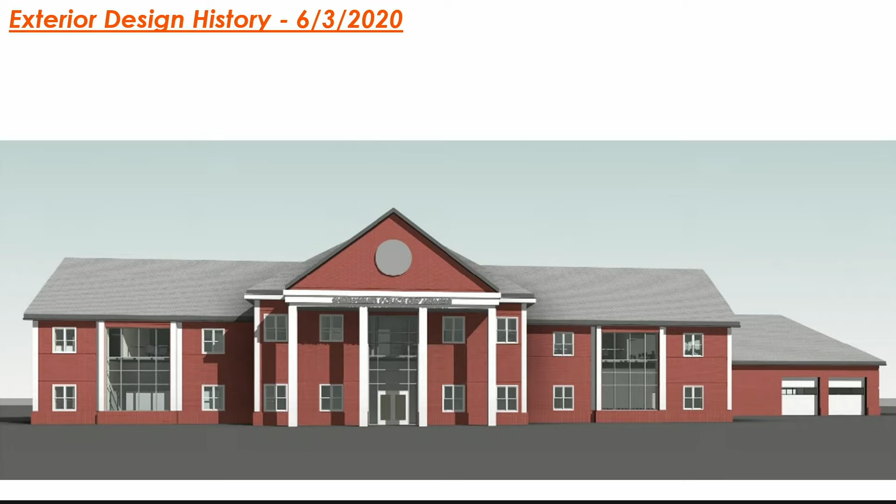It was instantly picked up on that the windows were low across the entire building, and that there was visibility and safety concerns with that design, among other issues. So we came back and said, all right, let's raise a lot of the windows up.

But we had discussed at one point that it still made sense in a couple of areas to keep some of the windows down a little bit lower, where there would be more visibility and less risk because those weren't officer-occupied spaces. So the clerk's office on the left, the training room, and some of the public meeting spaces in the front. At this point in the design, I believe those were just part of the lobby — I don't think those were interview rooms yet.

But so we had raised all of the other windows throughout the building up, and we brought up a stone base. And it had a really heavy feel. We had some feedback that it felt heavy, that it was starting to feel a little fortress-like. We also had this ugly entry canopy that I thought looked kind of neat, but nobody liked it, so we got rid of that.

So in July, we came back with another option and said, well, we can bring some of the windows down, keep it open, and bring in some planter beds and things like that to help protect the front of the building and bring the scale down. This is where we started to relate the central mass of the building and tie it back to town hall with this hipped roof. We had a fenced area instead of what has now become the cupola.

We still had that stone base, and it was heavy, it grounded the building, but we think this language started to tie a lot of the architecture together. And by having the planter in the front with some trees and things like that, it started to screen some of those windows and became more of a passive protection for the people in the building.

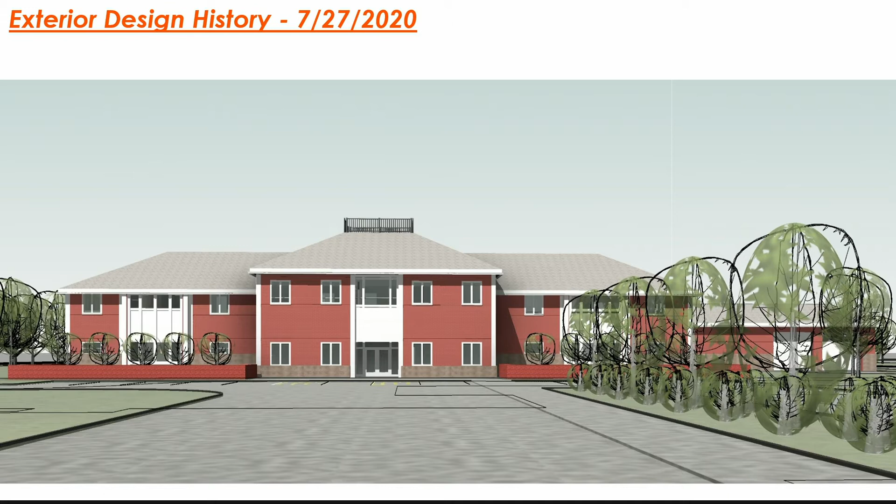And then this is what we took to town meeting, which is a variation of that same thing. It's basically the same design, just a little bit snazzier of an image. Again, the low windows at the clerk's and the training room at the very front of the building, and everywhere else we had raised the windows up, and we brought this heavier stone base up to match it as this sort of ground line that came through the rest of the building.

Then the question came up once again about the low windows, and we wanted to talk about safety and security. The question was asked, well, what about some other police stations around the area? What are other departments doing? So we brought in a few examples we had done — some fairly local, some a little further away: Lexington, Westport, Sutton, and Wilbraham, Massachusetts, all recently done by this team. Neil was the OPM on all of them except Lexington.

Just to give a sense of what other departments are doing — we have low windows in all the occupied spaces, and sometimes we do ballistic rated glazing. Of the departments we've done in the past 6 or 7 years, we did 2 with ballistic rated windows, and that one on the bottom right, Wilbraham, was one of them. It's actually not all the windows, just these two — that's the dispatch area. The rest of it we went with actual fiberglass framed, double glazed windows like you'd have in a lot of public buildings.

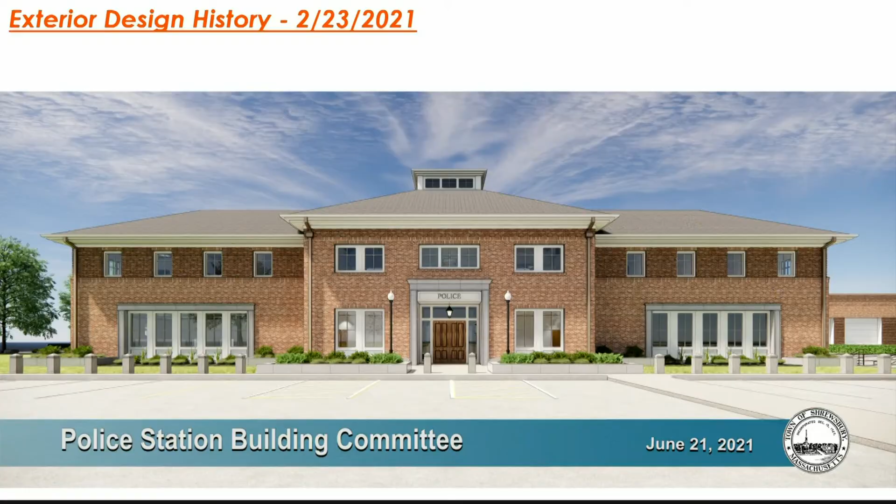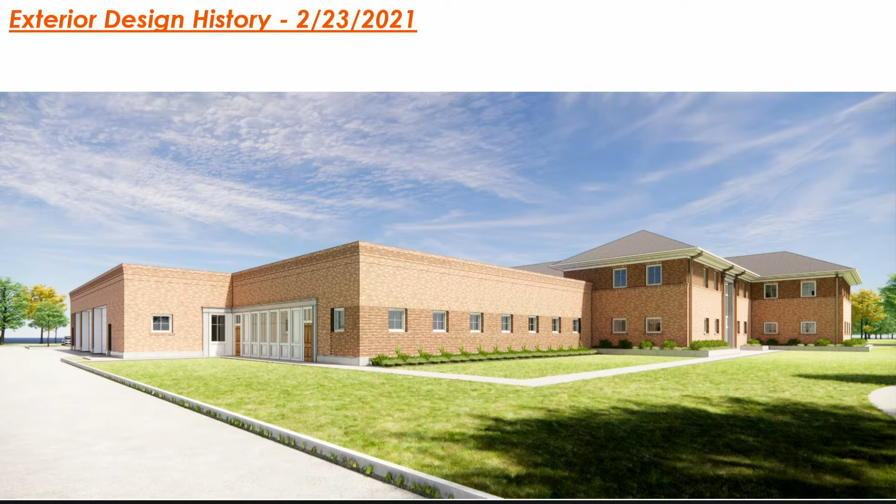So from there, after that conversation, we came back, and this is essentially where we landed. This was in February, much as it looks now, with some minor changes. This was the back when we had discussed lowering the roll call windows here. We had never really shown the elevation of that space until now, but you can see where all the other windows are raised up through the rest of the building into the officers' office spaces. For comparison, this is the head of a door, so the bottom of the window is somewhere in this range. And that's where we are today.

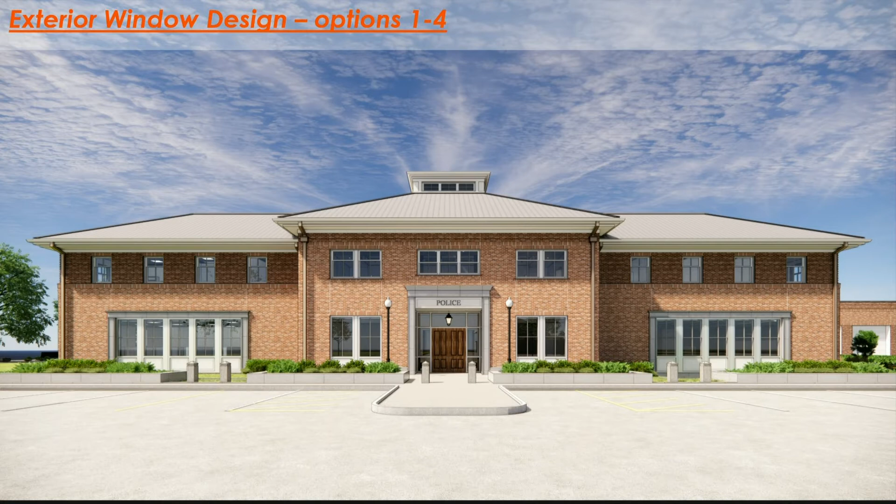So, since we're talking about bullet-resistant glazing, I have lots of options because there are a lot of ways we can go with this. I have some images that show the different options. There are 6 main types of options we can go with. The first 4 will leave the building looking pretty much exactly the way it is now, but they have implications on cost depending on the way we go.

Just as a reminder, the fitness room is back there to the bottom right. Options 1 through 4 have to do with the glass itself. The first one is no change, we leave it as is, with a nice thermally broken insulated glazing system, so operability of the windows allows natural ventilation in each of the occupied spaces. Option 2, if we're talking about just visibility, there was some discussion about visibility versus ballistic rating of the glass. One option would be to film some of the lower glass so you wouldn't be able to see in.

The disadvantage there is that it would change a little bit of the look of the building depending on the type of film we go with, and the top lights wouldn't match the bottom lights. You also wouldn't be able to see out, and it's always good to be able to see out of a police station, to have that eyes-on-the-street mentality. If somebody is coming to do harm to the building, you want to be able to see them, not necessarily just from the camera system, although there will be a robust camera system.

Option number 3 is replacing just those lower windows, just the lower lights, here at fitness, roll call, the public interview rooms, training room, and the clerk's office. It's about 330 square feet of window to do those areas, and we can replace those with ballistic rated glass.

So when you say about 8 feet, is it 8 feet from the floor where the person would be standing? The floor, yeah, I'm talking about from the floor. So it is 8 feet, not about 8 feet? I don't have the exact measurement right here, but it is about a foot over the head of a door, so that's about 8 feet.

From this image I won't be able to tell exactly. Is it almost like that door over there? Right, it'd be like the top of that door, the top of the transom.

Option 4: this would be replacing all the windows in the building, all the main exterior windows. There's about 1,850 square feet of glass, and using that same approximate low range of $180 a square foot, it'd be in the range of $330,000 to $600,000 to increase the ballistic rating to a level 3 for all the windows.

Now, option 4B is replacing the windows with a ballistic rated glass system. So what I've been describing is replacing just the glass. You'd still have your typical curtain wall frame, what you'd normally put the glass into. So it's ballistic rated glass, not a ballistic rated frame. There's potential that the frame could fail if shot at, because it's not a rated system.

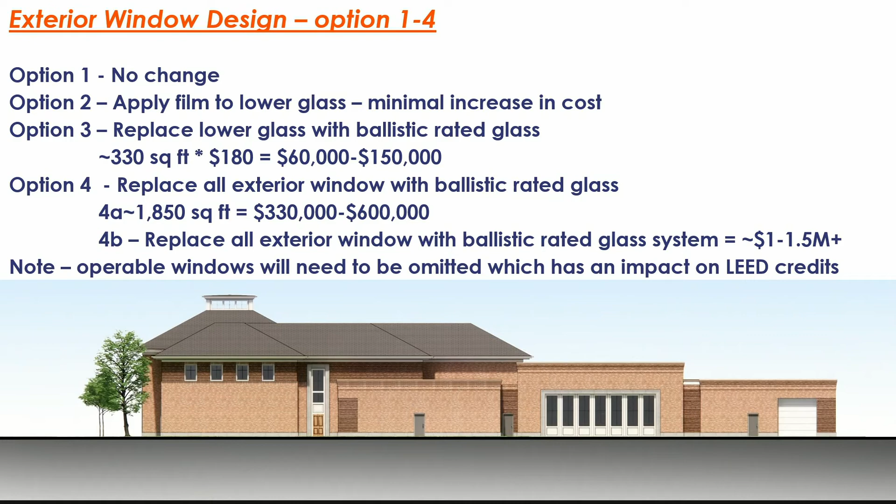Oh Donna, go ahead. I don't want to interrupt if you're still talking windows, but, so you showed us the 4 buildings in the state that you've done this for, right, as an example of 4 buildings. If you were to look nationally, are there police stations that take these types of issues further?

There are certain departments - I think Jeff can answer this, he does police stations nationally. The number of police departments I've worked on, and I've done over 100 over 30-something years, that actually have full ballistic glass throughout the entire building are very rare.

There are quite a number I've done where you identify particularly vulnerable areas. We have one small station near a busy roadway, so all the road-facing glass is protected at a level 2 ballistic rating, in case somebody's cruising by and taking random shots. We've done a number where they protect key areas - for instance, if you've got a lot of glazing near a roll call room, especially if it's public-facing, that's a good place to consider ballistic glazing.

I did the 4th Precinct facility down in Norfolk, Virginia - about a 40,000 square foot police precinct. It does not have ballistic glazing, but it utilizes predominantly higher window sills. It's a different, more modern kind of architecture. Pretty much every window except the lobby and training room are very high sills. The lobby and training room were designed for community use, so they don't get that high sill treatment.

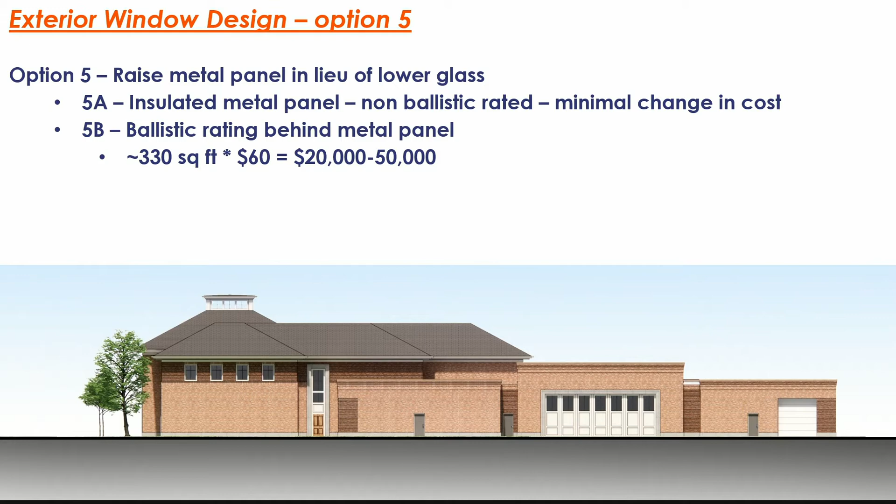If we were to add ballistic ratings behind that, there would be a modest add in cost to do those. There's additional edge metal framing work, drywall work. You'd have to buy the ballistic liner panels, which are not inexpensive, but it would be in the $20,000 to $50,000 range to do this.

And then the last option would be if we were to infill this area with brick. Brick is ballistic resistant in its material makeup, so we wouldn't have to add anything behind the wall to do that. It has an intrinsic ballistic resistance because of its density. There isn't an official UL ballistics test on brick, but it's 3,500 pounds per square inch. It's got good density, which means good mass to resist a projectile.

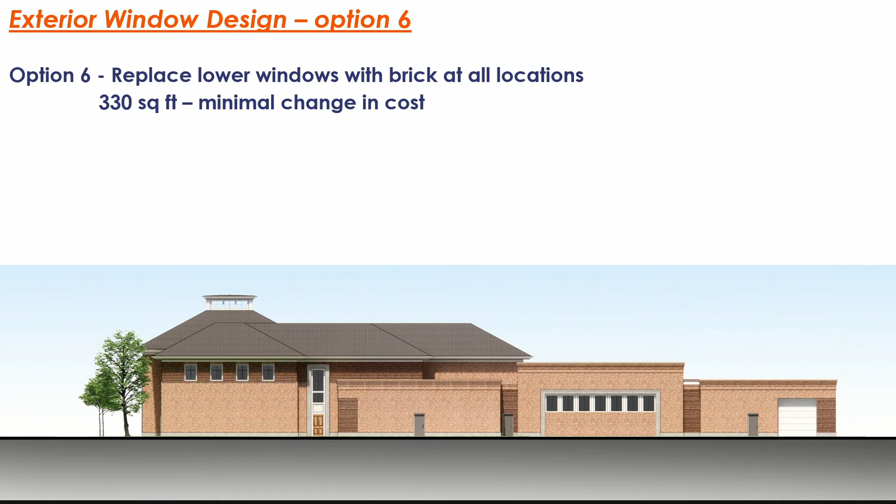And there's a minimal cost, it would be exchanging one thing for another with the windows and the brick. One thing I wanted to point out, if we went to a ballistic rated system, I just want to show you what it looks like. So this is a ballistic rated entry system.

So what you get is sort of what you see. It's that utilitarian storefront look, and it acts as storefront. There's a difference between storefront and curtain wall in its performance and the longevity of that system. So it's not as robust with the way that it drains and weeps out water. And then with its detailing and finish options, it comes in two colors: this silver unfinished look, which they call clear, and bronze. That's pretty much all you get.

We're proposing for everything to be bone white, which matches the trim around the campus. That would be a custom color to do with this system, which would increase lead time and increase costs. That's it for the frame, that's what it looks like. It's just that one rectangular profile.

To match and give that historic New England look, what we have proposed at the station in the renderings is a more robust trim profile that we would have to make up differently if we were to do it. So it would require us basically redesigning a lot of the facade to make this work.

Also, this thermal performance — this is a section through it, so you get an idea of how these things are put together. It's a much heavier frame system, basically a solid piece of aluminum. They call this thermally broken. This is the pressure cap, just the little piece that covers it up to finish it. So it's not really thermally broken.

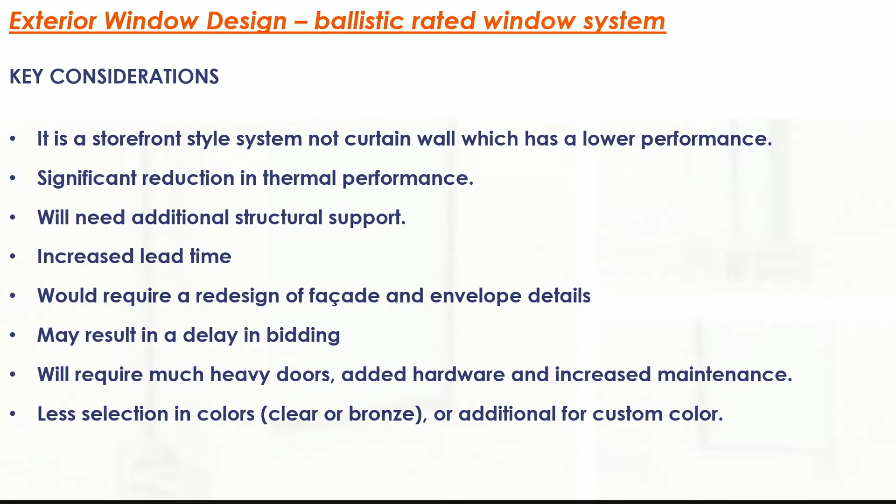Matt, can you go back one slide? I just want to compare. Maybe that's not, I think you went forward. You had them all listed, 1 through 6. Yeah, right there. So this is a comparison of all the different options, option 6 to option 3.

Does option 6 have the cost? It would be the minimal same change in cost. But option 5 to option 3 - option 5 is raising the metal panel and adding some ballistic ratings behind the metal panel, not changing the frames. Option 5 would be $20,000 to $50,000, give or take, and option 3, doing just the lower glass and not the frames, would be 60 to about 150,000.

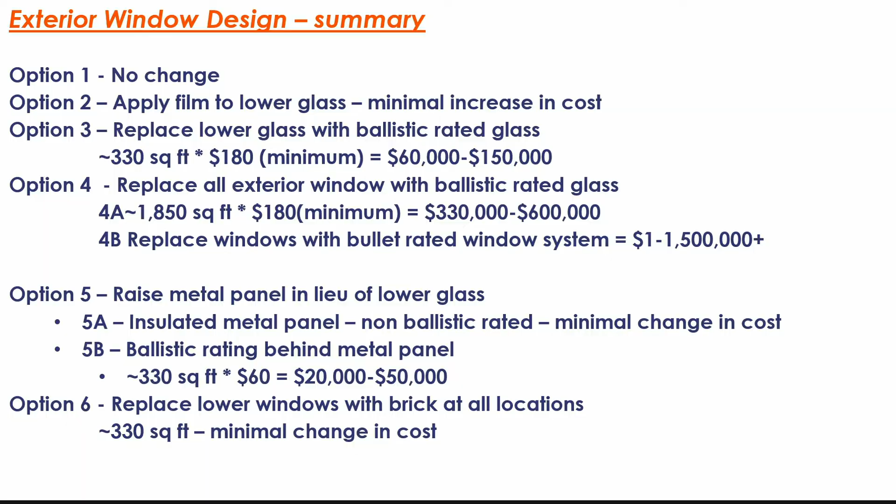So we do it where it's just the glass and not the frame. It's simply not a tested system. Like Jeff was saying, the brick is intrinsically ballistic resistant, but it's not a tested system. Same thing.

I can't sit here and swear on a Bible and say that if you shot at just the glass in a non-rated frame, that it would perform and not possibly fail. But it would be significantly better performance-wise in that situation than not having rated glass, if that makes sense. I guess my question is, on the frame, if we were just to do the glass and keep the frames we have, which I think look much nicer, in your expertise, what would you say it would be rated?

I know it's not rated, but can you give that? I certainly think it would slow down a bullet. Any material, if a projectile is coming into it, it's going to lose energy. Now, it might also fracture, so you might have smaller pieces going through. Would it get to a level 1? Maybe.

I don't recall what's on the other side facing Maple Ave. All the other windows are up high.

Would it even be in those two training rooms in the front? Yes, the only areas of the building at that point that would have lower windows that wouldn't be rated would be the vestibule where the entry doors are, because there's two layers there, and then one of the stair towers.

So, I know it's early, but we could be talking $150,000 to do the first floor, basically. And we spent $285,000 to make the air a little more comfortable in the building. To me, this is a no-brainer.

I hear what you're saying about the ballistic frames, because I've seen what you're talking about, the deterioration. And I think 95% of your shots are probably gonna be taken through the glass. It's probably gonna be an errant shot that goes through a frame. I agree, and I think even if it hits the frame, it's still gonna have some stopping power a little bit.

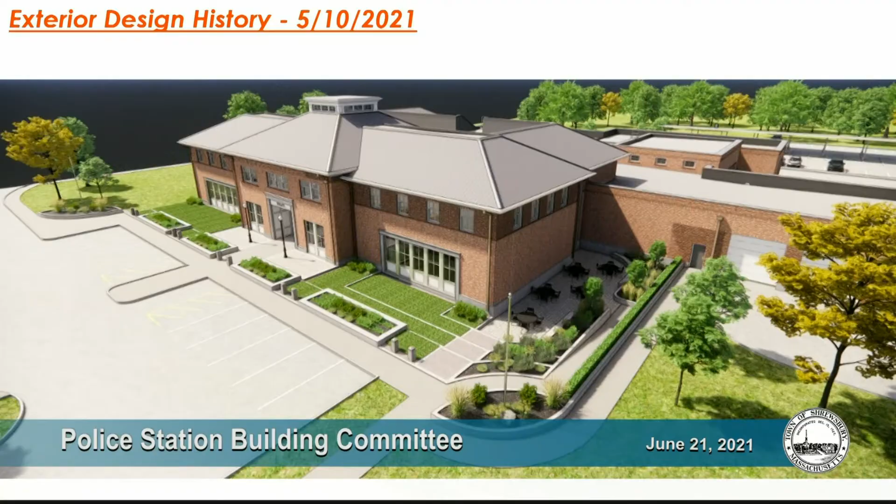So those are already raised up, though? Just these four windows, this little guy. I would recommend, if it was my building and my aesthetic, if we're raising the windows up, to do it with the metal panels and not the brick.

Architecturally, just the aesthetic of it, I think when you put the brick in, it starts to look pretty fortress-like. What's the ballistic rating of that, the one you were talking about that went behind the metal? It would be the same as what you have in the front lobby.

If you want it, at that point you don't see anything behind there. It's not really a public side of the building, so I'd be okay with that. Just to clarify, what you're talking about is the difference between glass that's bullet resistant and a Kevlar mat that gets mounted on the inside face of the sheetrock inside the building.

From the inside of the building, it looks like a sheetrock wall. From the outside of the building, it looks like a metal panel. And hidden between those two layers is a Kevlar mat that takes the round.

All the windows that are low enough, the low ones. Yeah, I mean, I think the admin staff should be safe as well. I agree, and also those front rooms where they're gonna be community rooms.

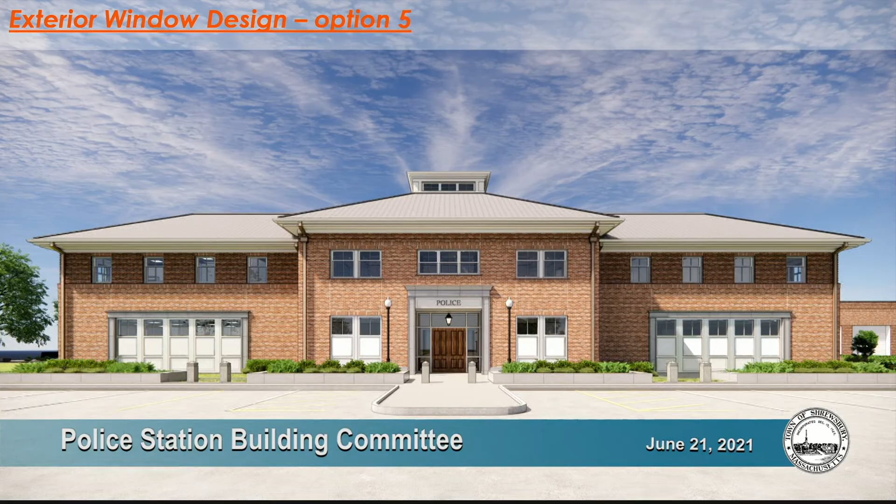We're talking about doing that, adding those metal panels in. You can't see into the building now, right? So do you still want them to be ballistic rated, or is blocking the vision like that enough for you?

A level 3 ballistic panel built into the wall is roughly a third the cost of the level 3 glazing. For that square footage, I don't remember what it is, but say 20 feet by 3 feet, 60 feet times $60 a square foot is what we'll spend on armor, so it'll be $36,000 - someone check that math, I think I'm putting a zero in there.

While you're doing the math, can I see the fortress again, please? No, the back. The back with the brick? Yeah, yeah, I don't mind the back, brick in the back.

But no, it's more expensive than the panels. It is? Yes, really? Is that more expensive than the panels? That would be more, yeah, so I didn't have a price option for that, but that would be more expensive than just the panels by themselves.

But what about the panels with the ballistic backing? Now it's splitting hairs, it'll be about the same as having that. Well, less than the glass, though. No, right, it's less than the glass. So less than the glass.

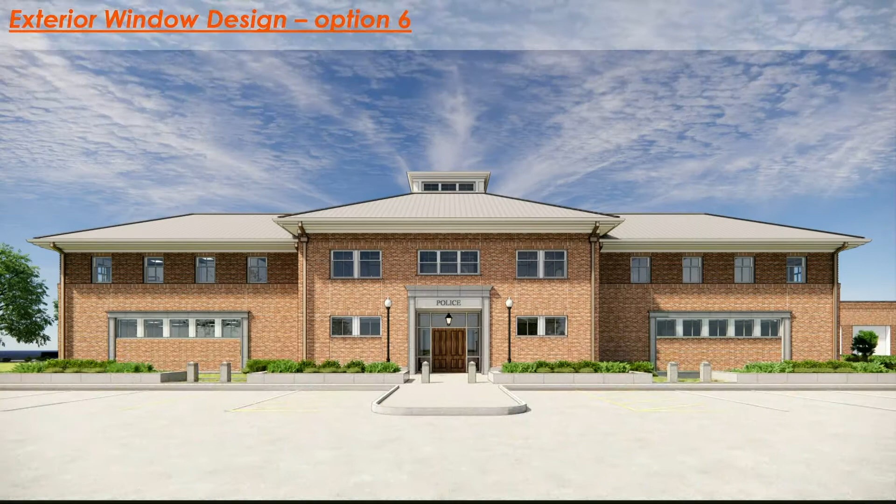And are you comfortable, chief, with that compromise of doing the panels around the back and doing the glass? I personally like the glass, the full thing, even around the back. But I know it costs more. I do like the design the way it is right now.

I guess that one's not too bad, but in a perfect world, if we could just make all first floor glass, you guys would in a perfect world. Yeah, right, I know. So now my head's scrambling.

Is the glass more protection than the panel? No. Is it less protection than the panel? No. We're proposing it at the same ballistic level, the glass to the panel. So it's equal in protection, different in cost.

Obviously glass is transparent, we're trying to save something. How much would we save in the back by putting the panel? Just that window, what did I say, $10,000? If we did that one in roll call, more like 20,000. Again, that's the low end of Matt's range.

Could be more, probably not less. I mean, I think, since this isn't a public side of the building, if we can save $20,000 here - because we don't know what material costs are gonna be going forward, including structural steel - I think where we have opportunities to save money and keep the aesthetics for the public view, that's something we should be doing.

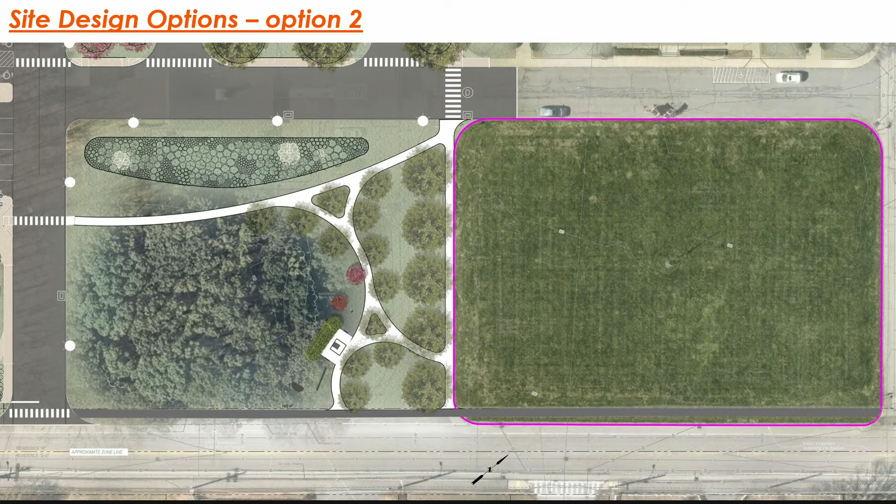We're also continuing to work through options for the softball field and second egress off the site. We did bring the planning board up to speed that we're looking into this and that we would probably be pursuing a de minimis change with this should we go forward.

We're also trying to keep it out of the wetlands buffer zone too, to keep this out of Concom so that we don't have to go back. But we would be looking at probably doing some version of this second exit drive out of here that would be used for emergencies only. And we'd be looking at doing like a turf pave system or something like that so that it's not really there, but it's there if you need it.

We're just working out the logistics and locations for these two soccer fields and how the softball field works out. I thought I was gonna have an updated plan with some options today, but it did not come in time. So more to come on this, but this is something we're gonna be continuing to work through. Oh, that's all I had.

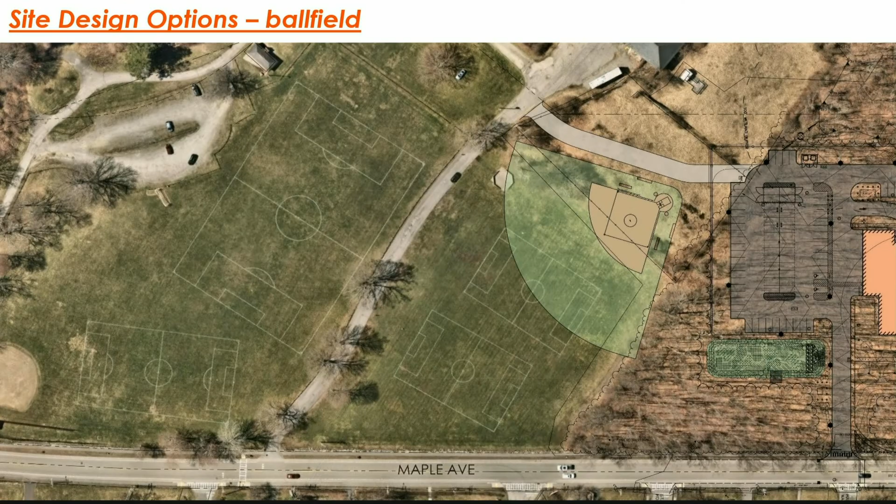So let's look at some finishes. That's all I had for slides. So, Brianna's here. So we can look at the interior finish boards that were dropped off a little while ago, and then we do have some updates and other samples.

And then these are some of the exterior finishes. So this is what we're looking at for the brick. This is our precast concrete finish.

Our metal roofing is gonna be this color here. And then all the other metal trim on the outside of the building is gonna be this, which is bone white. This is just a sample of what the roofing looks like. So it's not like your standing seam roof that you see on a lot of commercial buildings. It's a standing seam shingle.

So in a regular standing seam roof, this would go the whole length of the roof all the way up and down. These are this big and they come in tiles and they all interlock together into this, so that it has more of a slate shingle kind of look to it. It's a really attractive system.

This isn't exactly the curtain wall material that we're using, but this was just to sort of give you a sense of how these components come together, to show the difference between this and the ballistic frames. And then this is what the glass will look like.

This is actually Solarban 90 with Acuity, they call it, so it's got an extra low iron. They used to call this Starphire glass. This is a new version of it, and it has better visibility through to the outside, so that you'll have better view of your surroundings at night and things like that. Okay, better eyes on the street thing, so it's a security thing.

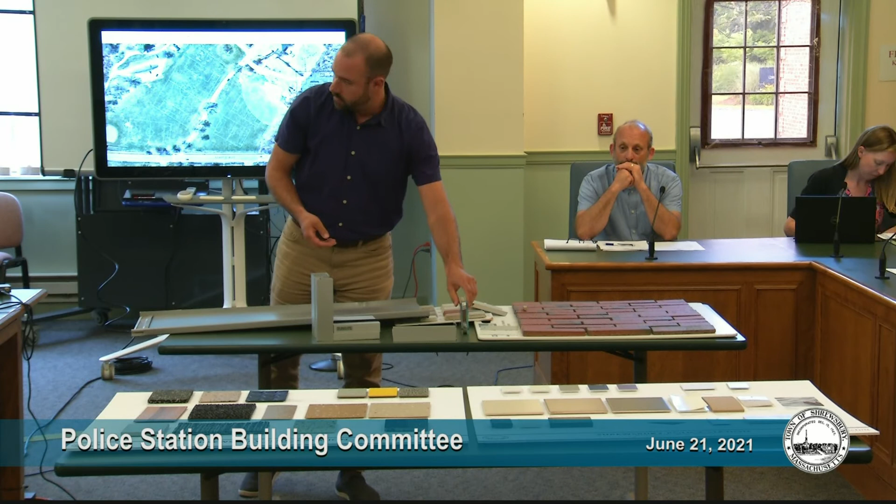That's all, I'm gonna let you in. We've gone through all this, so really, I think this can just be an open discussion and conversation about finishes. There's been lots of discussions behind the scenes, and I think we can all come together. I think the main thing to point out, though, is we're talking product quality and where it's going. The colors, we can always adjust as the finished trades come in to the project.

Yeah, and then just going off of colors, I know there were some concerns about some of the black flooring finishes. That was me, coming in directly from the exterior, which is completely valid, so I did bring some other, that same product, which is a walk-off carpet tile. I just wanted to show you that there are plenty of color options available, which I actually have a meeting with the chief from the department on Thursday to go over the exact colors, so we'll touch on that then, but you can see there's a broad range from grays to browns to solid blacks and everything, so we'll take a look at a more neutral color that will hide some of that.

Based on your experience, does that black show more of the traffic? Because the product itself looks great, it's just, I worry about what it looks like by noontime. There's a compromise with one end of the spectrum or the other. With the black in the winter, you're gonna see the salt. But in the rest of the year, when it's mud and stuff like that, it blends in easily with the black.

Whereas the lighter colors, like some of the tones that go more with the terrazzo and the lobby and stuff like that, you're going to see the mud the majority of the year, but you won't necessarily see the salt during the winter.